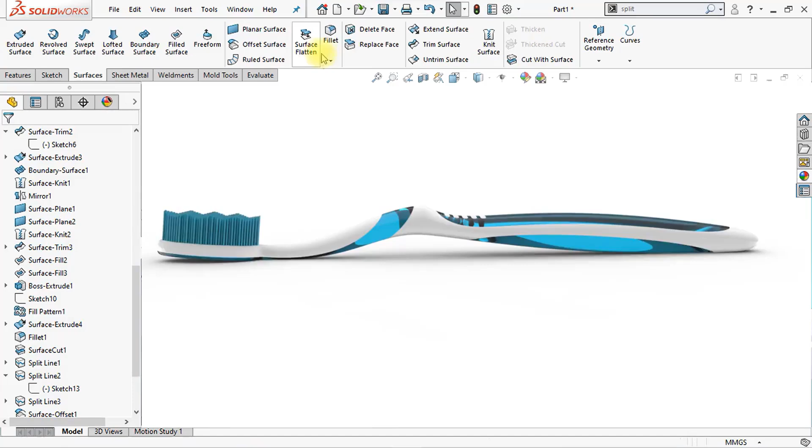Alright, so we're going to start this lesson by making a 2D sketch because we're going to draw the main shape of a toothbrush, so this contour right here.

So we're going to start by opening a new part. Now we're going to change the background color, so click at the Appearance drop-down menu and select Plain White. Alright, now we're going to create a new sketch on the front plane, so select the front plane in the feature tree and click at the 2D sketch icon again.

Now we're going to draw a center line. Click at the center line command and draw a vertical center line up till here. Now hit escape to close the command, and we're going to create another center line starting at this point right here up till here. Now hit escape again and create a third center line starting from here up till here.

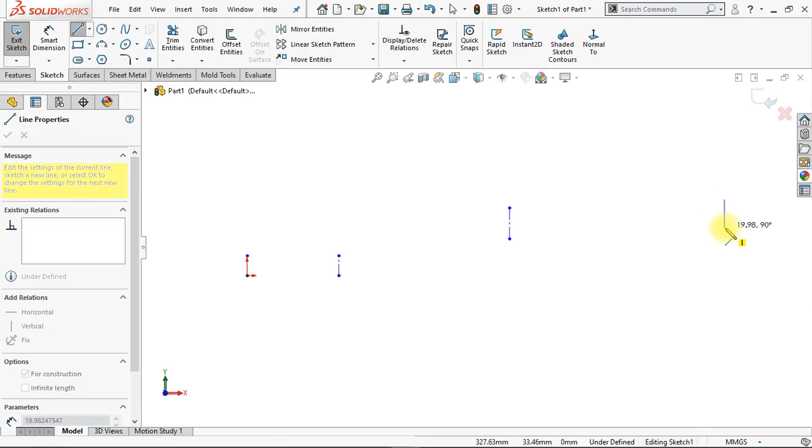And now we're going to create another center line from here up till here. And by the way, if you want to create new center lines, you can also click at Enter in case to reopen the previous command.

Alright, the next thing we're going to do is apply a couple of smart dimensions because we're going to use those center lines in order to define the main shape of our toothbrush. So we're going to make sure to add a horizontal relation between those points right here, and we're going to make sure that the length of those lines is equal by clicking at the equal icon.

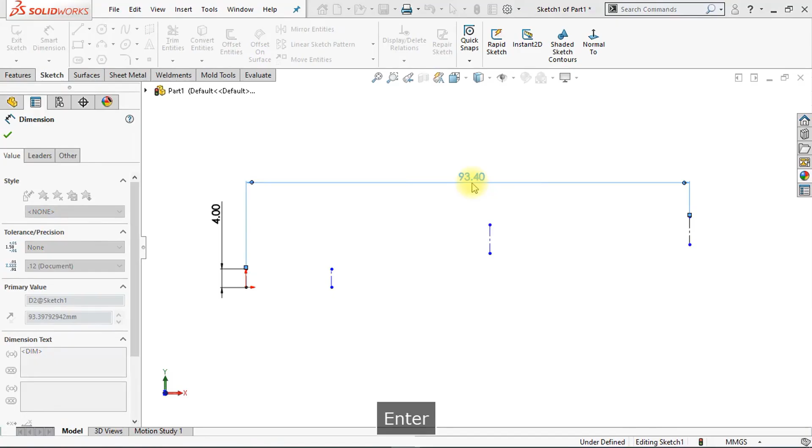Now we're going to make sure that the distance between those two lines is 160 millimeters. And we're going to make sure that the distance between those two lines is 26 millimeters.

Now this line is fully defined, so now we're also going to apply a dimension between those two lines, and the length between those two lines will be 44 millimeters. And the length of this vertical line right here will be 8.5 millimeters.

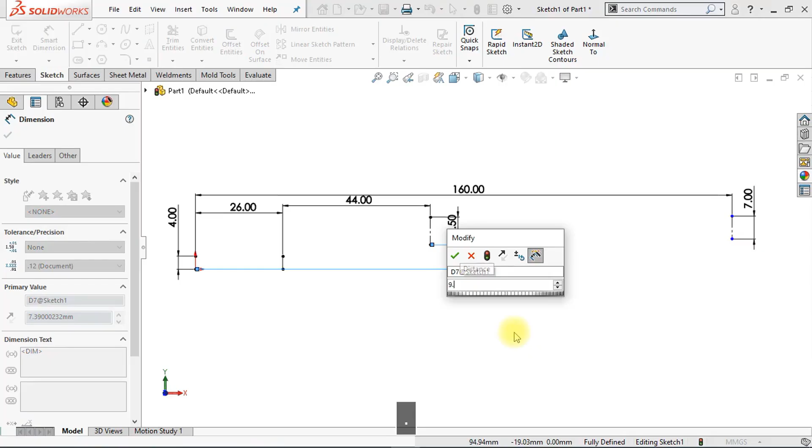Alright, now we're going to define the length of this line right here, and this line will have a length of 7 millimeters. And we're going to make sure that the distance between those two points will be 9.5 millimeters. And now we're going to make sure that the height between those two points is 10 millimeters.

Alright, this looks good. Now we're going to disable the trailing zeros because we have 0.00 behind every dimension, and we can do that by going to Document Properties, Dimensions, and if we click at the trailing zeros right here, we can click at Remove Trailing Zeros and click OK. And now we don't see those unnecessary zeros anymore.

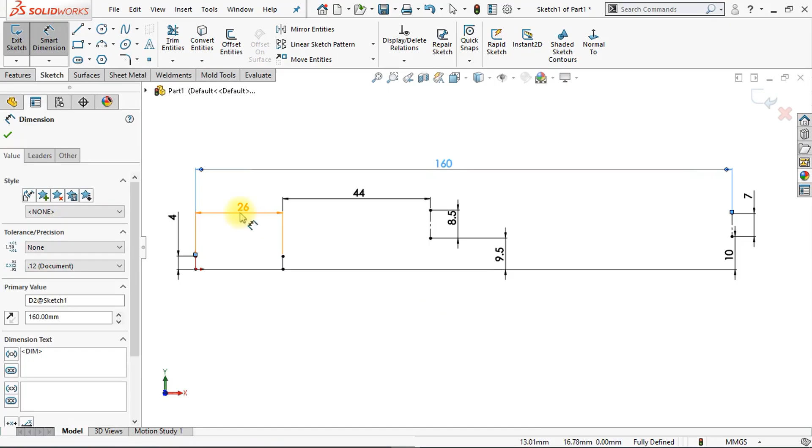Alright, we can align our dimensions a little bit more. This looks about right.

Alright, so the next thing we're going to do is we're going to draw a couple of splines. So click at the spline command and we're going to draw a 2-point spline from this point up to this point. Now we're going to draw a second spline from this point up till this point. Now hit escape to close the spline command.

Now we're going to draw a third spline from here up till here. Hit escape again. Now we're going to create another spline from this point right here up till this point right here. And now we can activate our spline handles.

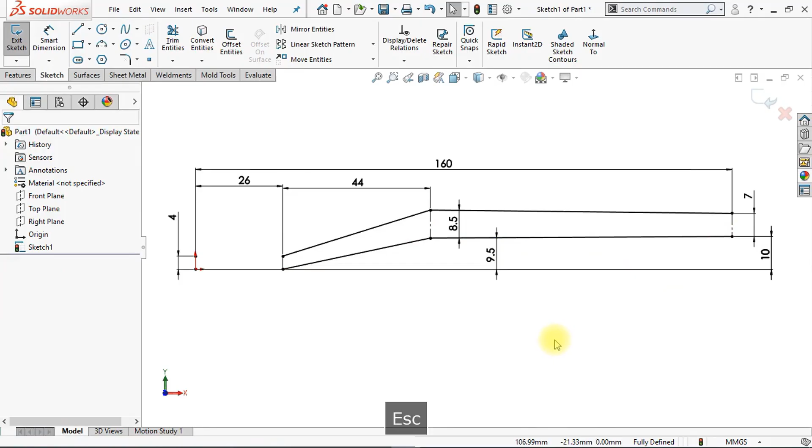So if we're going to zoom in on one of the splines, we can select the spline and now we can activate the spline handles by clicking at those handles right here. And we're going to make sure that this handle right here has a horizontal relation, so click at Make Horizontal.

And we're going to make sure that the length of the spline handle will be 60 millimeters. Alright, now we're going to make sure that the length of this spline handle will be 55 millimeters, and the angle between the spline handle and this vertical center line right here will be 100 degrees. Alright, this looks good.

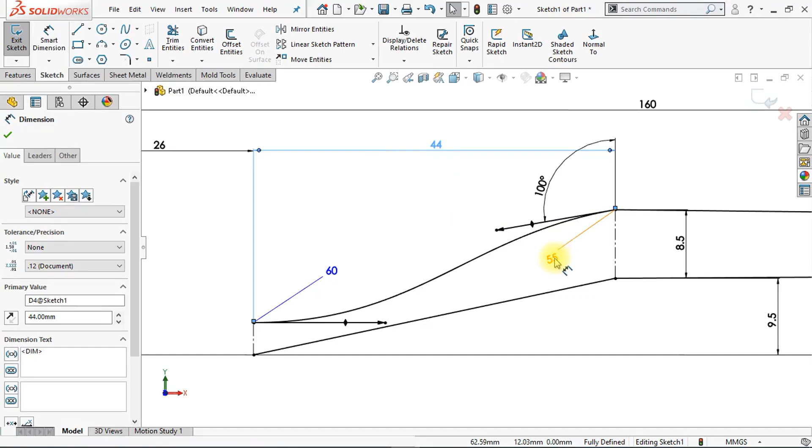Now we're going to apply a couple more smart dimensions to the other splines. We're going to activate this spline handle right here and drag to those handles. Now we're going to make sure this spline handle also has a horizontal relation, so click at make horizontal. And this spline handle right here, we're going to make sure this one is horizontal as well - select the endpoint and click make horizontal again.

Now we're going to make sure to define the length of those spline handles as well. This spline handle will have a length of 75 millimeters, and this spline handle will have a length of 40 millimeters. All right, this looks good.

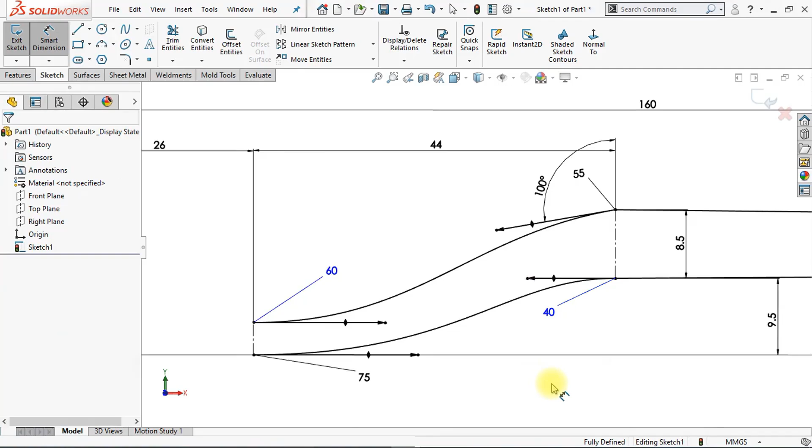Now we're going to activate this spline handle right here and drag a little bit to it in order to adjust the shape. We're going to make sure the length of this spline handle will be 40 millimeters, and the angle between the spline handle and the vertical edge right here will be 120 degrees. All right, this looks good.

Now we're going to move this dimension a little bit, and look to the last spline handle on this side right here. We click at Smart Dimensions again, and make sure the length of this spline handle will be 200 millimeters. And the angle between the vertical edge right here and the spline handle will be 85 degrees.

All right, now this spline also looks good. Now we're going to activate this spline right here, and select this spline handle, making sure the spline handle is horizontal again. And we're going to make sure the length of this spline handle will be 40 millimeters. Just like that. All right.

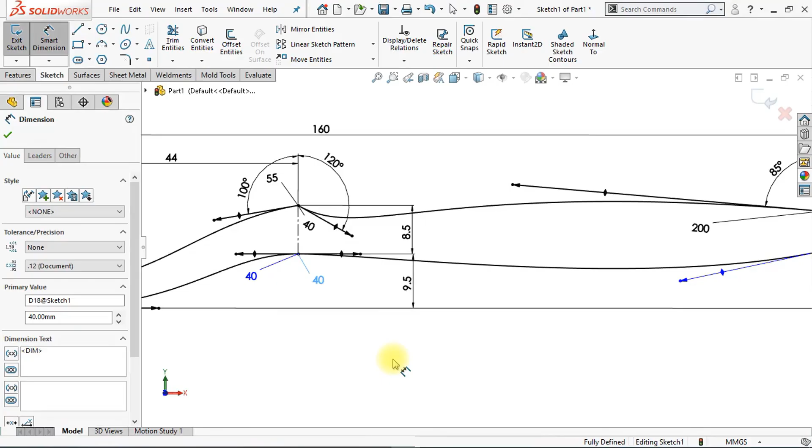Now we're going to adjust this a little bit. We're going to make sure this spline handle will have a length of 45 millimeters, and make sure the angle between the vertical center line and this spline handle will be 84 degrees. And the length of this spline handle will be 150 millimeters. All right, this looks good.

Now we're going to zoom in on this endpoint right here, and click at the style spline. We're going to draw a style spline from here up till here, and make sure to have two spline points in between.

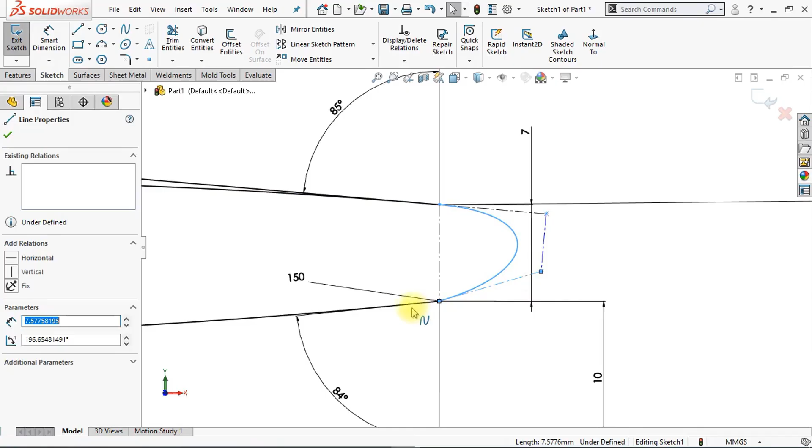Now we're going to apply a tangency relation between the center line and the initial spline, and do the same thing for this side right here. We're going to make sure this center line has a vertical relation. Now we're going to make sure the length between those two vertical center lines will be 9 millimeters. Now our style spline is fully defined, so this looks good.

We can move those dimensions a little bit. All right, this looks pretty nice.

All right, so now we've created the 2D sketch of our main contour. The next thing we're going to do is apply some surface lofts in order to create this curved shape right here. So we're going to divide our main sketch into multiple segments, which we're going to loft individually, and then we're going to make surface transitions between each of those lofts later on.

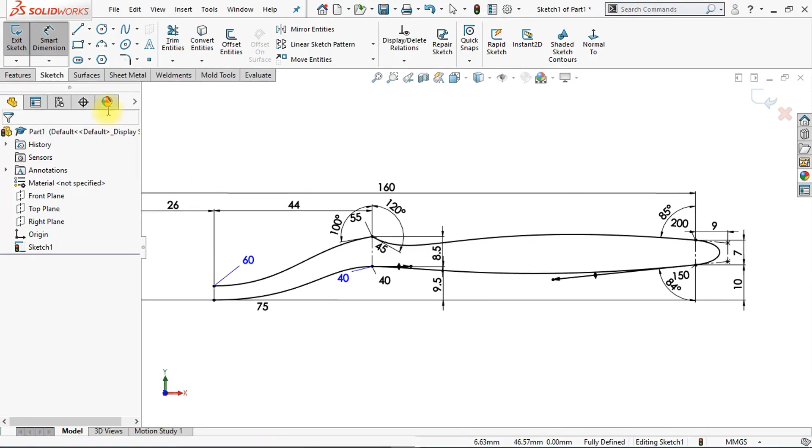Alright, so the next thing we're going to do is create an extruded surface. Click at the extruded surface command right here, and we're going to make sure to set the extrusion depth to 5 millimeters, and reverse the direction, and now click OK.

Alright, now we're going to create a new sketch on the top plane again. So select the top plane, click at the 2D sketch icon. We're going to zoom in on the front section right here, and now we're going to draw an ellipse - click at the ellipse icon, and we're going to start the midpoint of the ellipse right here till the origin.

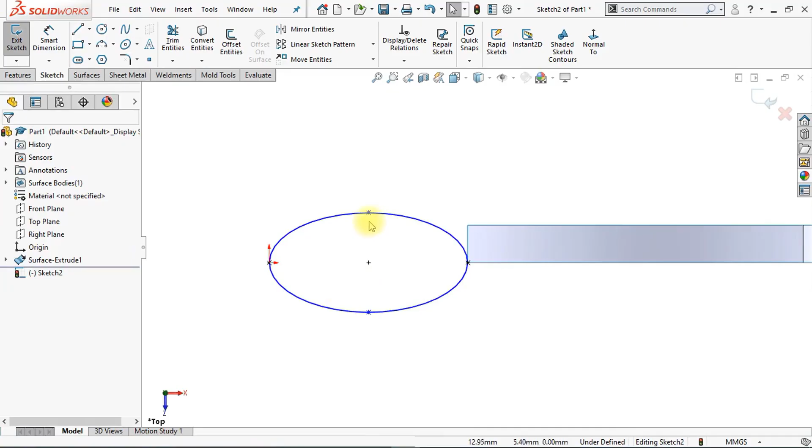Now we're going to make sure to connect this point with this point right here by holding down the Ctrl key and selecting coincident to connect both points. Now we're also going to make sure to make those two points vertical from each other, and make sure the length between those two points is 6 millimeters.

Now we're going to draw another center line from here up till here. And we're going to make sure to use the trim entities to select the power trim in order to trim this part of the line away.

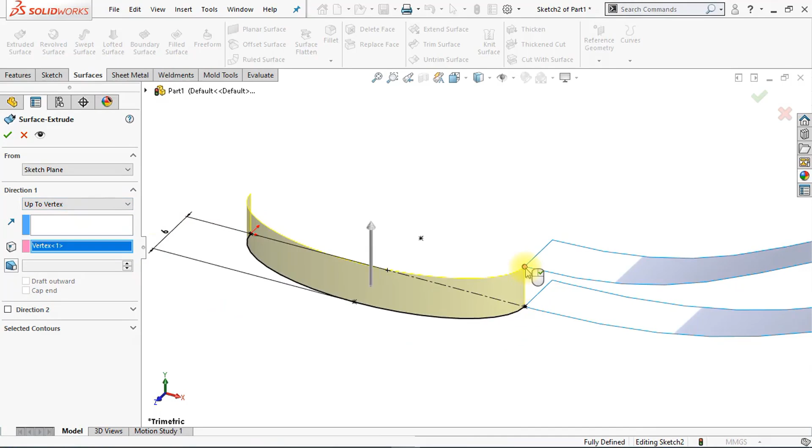Alright, now we're going to draw another surface extrude, so click at the surface extrude option, and we're going to click it up to vertex. We're going to select this corner point right here. Now click OK, and now we have created a beautiful surface extrude.

Now we're going to create a surface loft between those two edges. Select those two edges as loft profiles, and make sure to set the tangency to face. Click tangency to face and change the value to 4, and also change the second profile to tangency to face and set it to 4 as well. Now click OK.

Now we're going to create a new sketch on the top plane. Select the top plane, click the 2D sketch icon, and zoom in on this section right here.

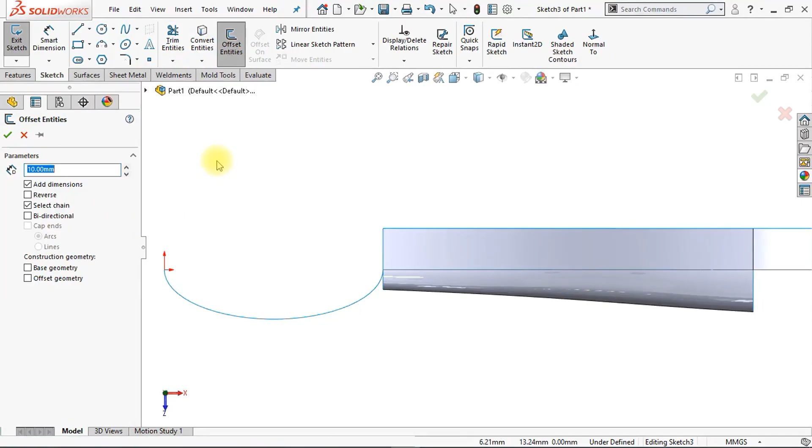Now we're going to create an offset entities. Make sure to set the offset distance to 1.5 millimeters, and select this vertical edge right here. Now select this vertical edge again, click at 2.5, and reverse the direction.

Now we're going to extend those lines a little bit. Make sure to drag to the endpoints up till here.

Now we're going to click trim surface in order to trim this part of our lofted surface away, as well as this surface extrude right here. Now click remove selections, and now the purple sections will be removed.

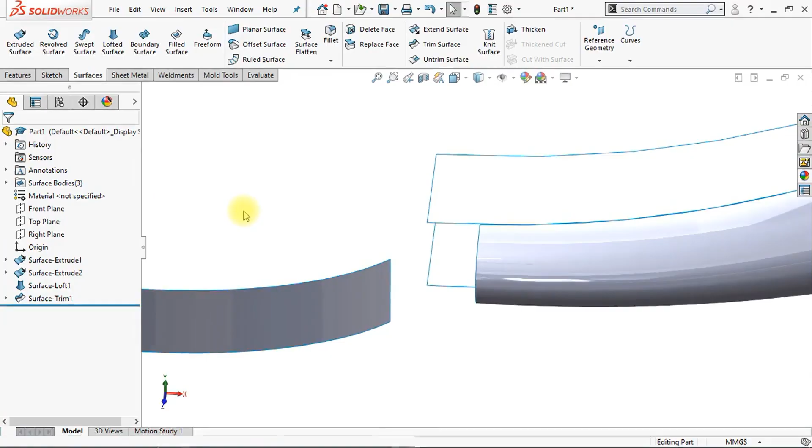This looks good. Now we're going to create a new sketch on the front plane again. Select the front plane, click Normal To, and zoom in on this point right here.

Now we're going to create another ellipse, starting at the center of this edge up till here. This looks good. Hit escape to close the ellipse command, and we're going to make them horizontal.

Now click Smart Dimensions, and make sure that the distance between the midpoint and the outer edge is 1 millimeter. Now our ellipse is black, which means it's fully defined.

Now we're also going to draw a vertical center line right here. We'll click Trim Entities, and then click and drag in order to remove this part of the ellipse.

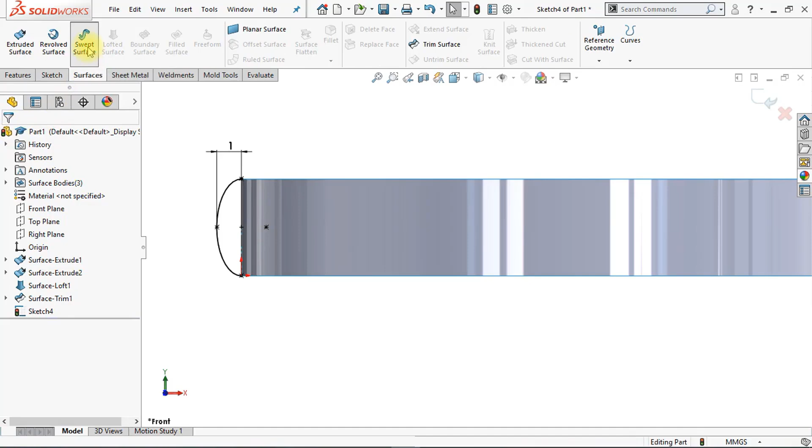We're going to click Surfaces again, then click the swept surface. We'll select the ellipse right here as a sweep profile, and select this pink edge right here as a sweep path. Now click OK, and now we have created a beautiful sweep.

Now we can hide the initial surface extrude right here, and zoom in on this point, because we're going to create a surface transition between those two edges.

Click Surface Loft, and select this edge right here and this edge right here. Make sure to set the start and end constraints to tangency to face, and change the value to 1.5. Now do the same thing for the second profile, and click OK.

And now we have created a beautiful surface transition between those two surfaces right here.

Alright, the next thing we're going to do is create a new plane. Click the Reference Geometry drop-down menu, select Plane, and select this point right here as a first reference.

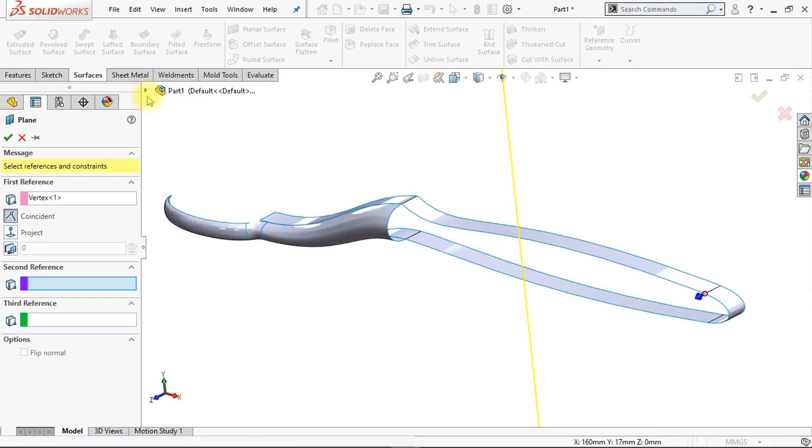Now we're going to open our feature tree and select the right plane right here. We'll close our feature tree again, and now click OK.

Alright, now we're going to create a new sketch on this newly created plane. Click the 2D sketch icon in order to create a new 2D sketch.

We're going to create a style spline again. Click style spline, and draw a style spline from here up till here, up till here, up till here. Now hit escape.

We're going to switch our view to Normal To, and make sure to set this one to hidden lines only.

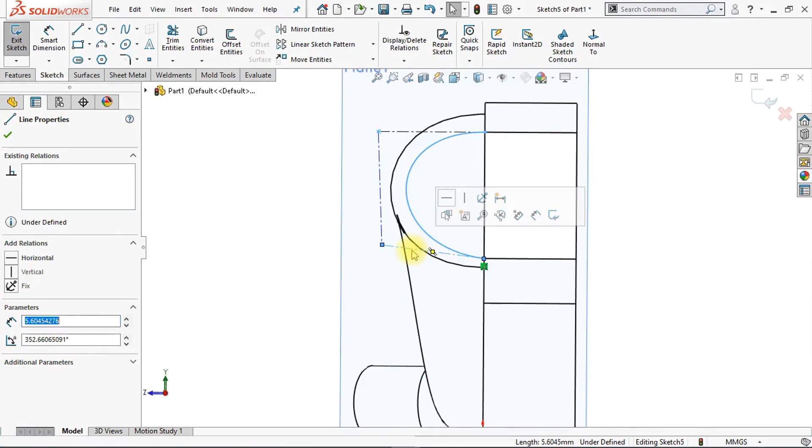Now we're going to make sure to make this line horizontal and this center line as well. Click Smart Dimensions, and make sure that the length of this horizontal line will be 8 millimeters. This looks good.

Now we're going to make sure to set the angle between those two center lines to 75 degrees.

And now we can close the sketch. Alright, now we're going to switch back to shaded with edges. And then we're going to hide this plane right here. So select the plane, click at the eye icon to hide the plane.

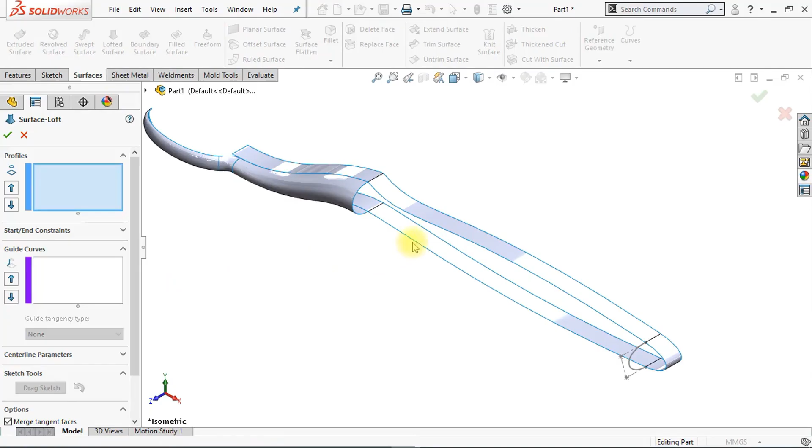And now we're going to create a new surface loft. So click at lofted surface right here. We're going to select this profile right here as our first profile, and this will be our second profile. And now we're also going to select the guide curves: this guide curve right here and this guide curve right here.

Now we're going to make sure to set the surface start end constraints to tangency to face right here, and set the value to 3. The end constraint will be tangency to face as well, and we're also going to make sure to set this one to 3 as well. Now click OK, and now we have created another beautiful surface loft right here.

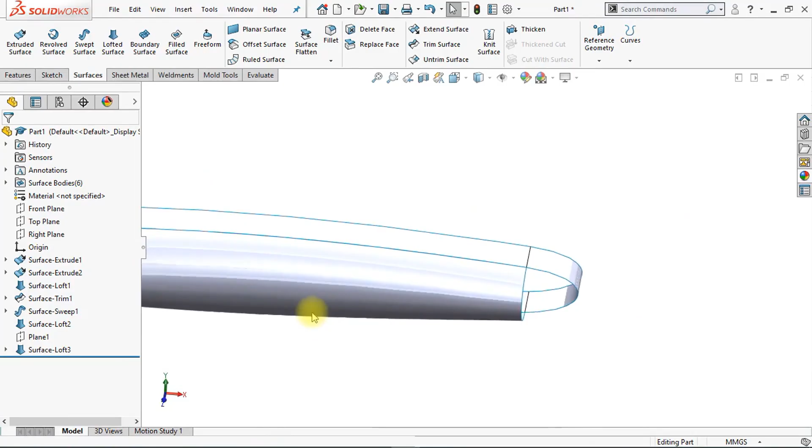Alright, now we're going to make sure to fill this surface right here. In order to do that, we're going to use the filled surface. Therefore, we're going to select those two edges right here. Make sure to click at apply to all edges, and we're going to apply a tangency relation, setting it to tangent. We're going to deselect the optimized surface and now click OK. And now we have created a beautiful surface.

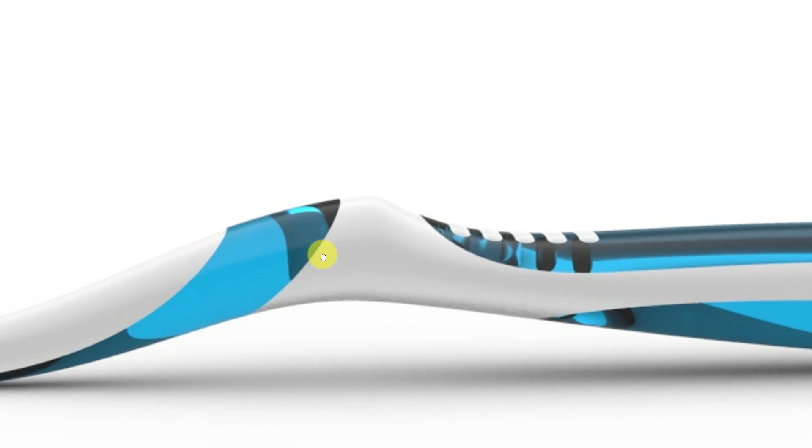Alright, so now we've created this main shape right here, and we also created this main shape right here. The next thing we're going to do is create this surface transition right here. Once we have created this surface transition, we're also going to create the surface transition in this area, because we created this surface and this surface, but we also want a smooth transition in this area right here. So that's what we're going to do next.

Alright, now we're going to hide our surface extrude because we don't need it anymore. And we're going to select the front plane and click at the 2D sketch icon in order to create a new sketch on the front plane again.

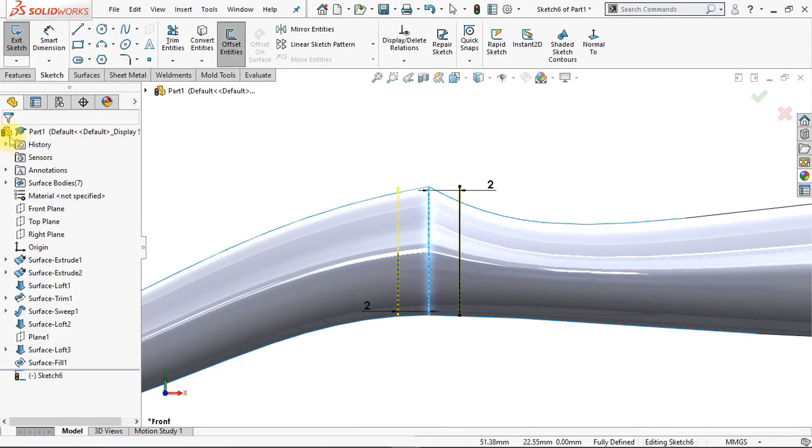Now click at offset entities, and we're going to select this edge. Make sure to set the offset distance to 2mm and click bidirectional in order to make an offset in both directions. Now we can click and drag to the end point of those sketches right here in order to extend them a little bit.

And now we're going to trim those two surfaces right here. So click at the trim surface, select the remove selections, and this will make sure that our purple surfaces will be deleted. Alright, the next thing we're going to do is we're going to create a new transition between those two surfaces right here.

And therefore we're going to create a new sketch on the right plane. So we're going to create a new spline, and we're going to make sure to add a couple of transitions between those spline and the endpoints by clicking at the edge, selecting the spline, and now adding a tangency relation to both sides of our spline.

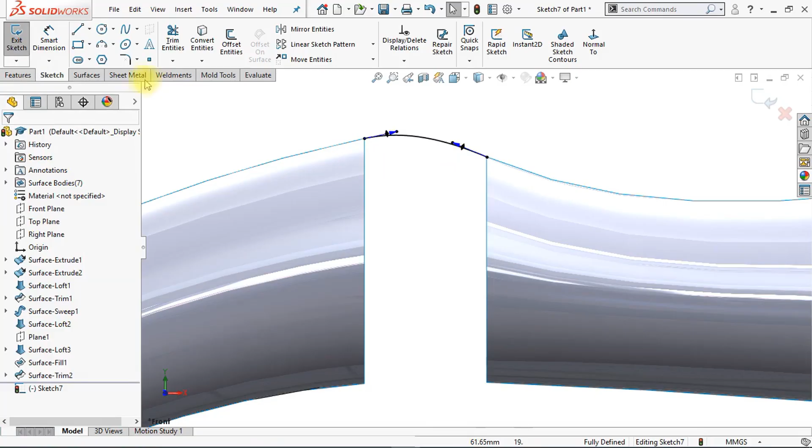Now we're going to make sure that the spline handles will have a length of 6mm.

And now we're going to create a style spline for the lower section right here. So we're going to select those lines right here. We're going to apply a tangency relation right here. Now we're going to select this edge, hold down your Ctrl key and click at make tangent again.

And now we're going to make sure to delete this endpoint right here, this spline point right here. And we're going to make sure that this center line right here and this center line will be equal. So we're going to select them both by holding down your Ctrl key and click at make equal.

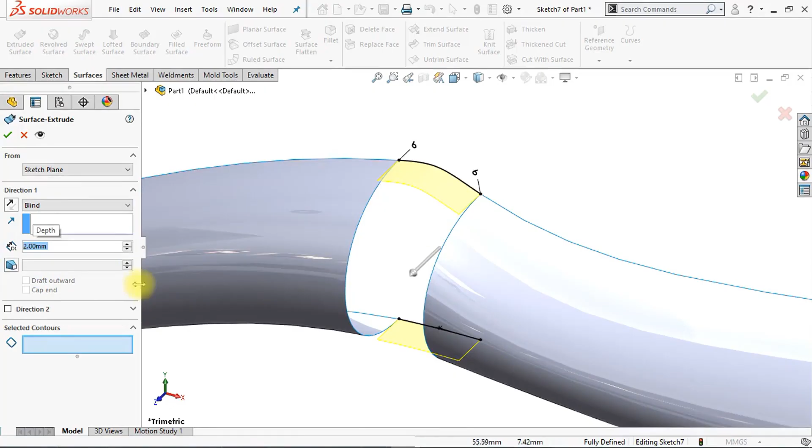Alright, the next thing we're going to do is we're going to create a new surface extrude. So click at the surface extrude, make sure to set the surface direction and depth to 2mm. Click at reverse and now click OK.

Alright, this looks good. Now we're going to click at the boundary surface, and we're going to create a boundary surface between those two faces right here by selecting the first edge and now select the second edge. And now we're also going to select this third edge right here and the fourth edge right here.

Now this is not looking exactly how we want it, so we're going to delete those last two edges right here. So click at delete, and now we're going to select the direction 2 box right here.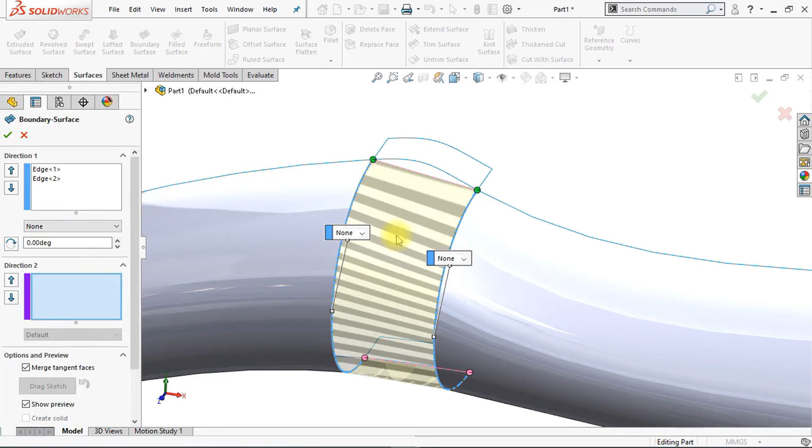Now we can select this line again, and we're going to do the same thing for the other line right here. So select this line as well. Alright, this looks much better.

Now, of course, we also need to apply a transition right here. So click at the tangency to face. We're also going to set the second one to tangency to face, and we're also going to make sure to set those two to tangency to face.

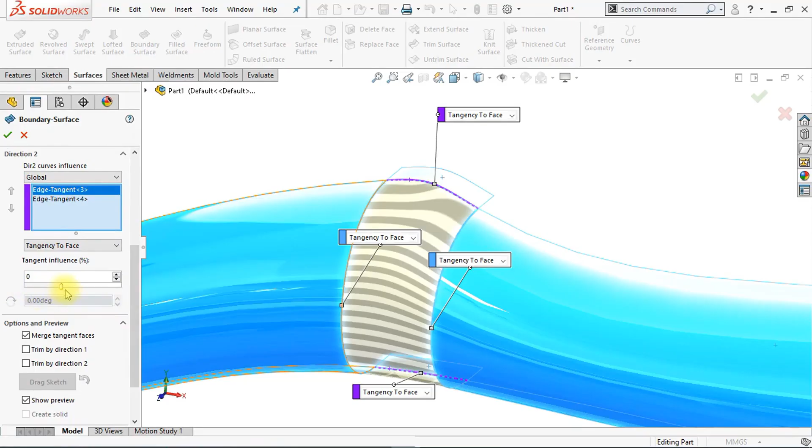Alright, this looks pretty good. Now we can also adjust the tangent influence, and we're going to make sure to set the tangent influence to 100%. And we're going to do the same thing for the tangent influence right here. Set this one also to 100% and now click OK.

Alright, this looks good. Now we can hide our surface extrude because this was only a help surface. And now we have created a beautiful surface transition right here.

Alright, now it's time to knit all those surfaces together. So we're going to select the first, second, third, fourth and fifth surface right here. Now click at Merge Entities and click OK. And now we have merged all those surfaces together.

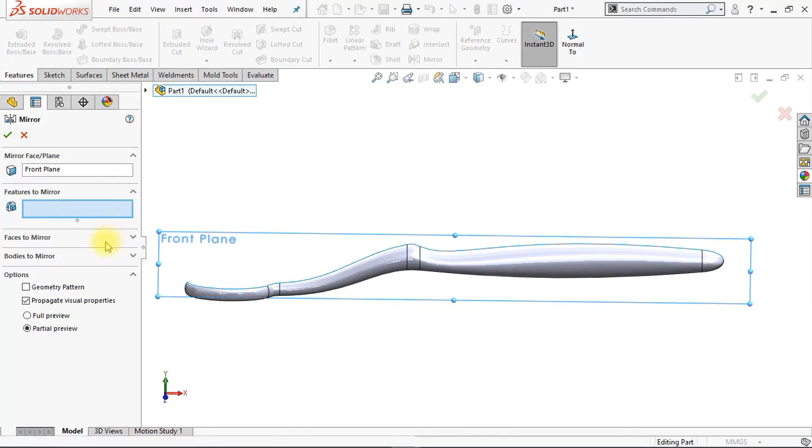And the next thing we're going to do is we're going to create a mirror. So select the front plane in the feature tree, and we're going to click at Bodies to Mirror right here. Now select the knit surfaces and click OK. Alright, this looks pretty good.

Now we're going to click at the planar surface. We're going to zoom in a little bit and we're going to select those two lines right here in order to create a planar surface. Now click OK.

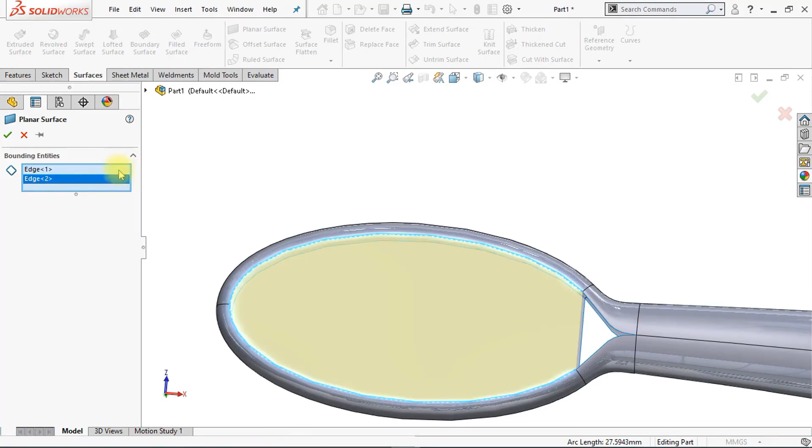Alright, now we're going to create another planar surface for the other side. So we're going to select this edge right here and this edge right here. Now click OK again. This looks good.

Now we can knit all those surfaces together. So we're going to select each of those three surfaces in order to knit them all together. Alright, this looks good.

Now we're going to create a new sketch on the top plane. So select the top plane, click at the 2D sketch icon. We're going to zoom in to this edge right here.

Now we're going to click at the spline command. We're going to draw a spline from here up till here. Now hit escape to close the spline command, and now we're going to make sure that this midpoint and the end point of the spline will be vertical to each other.

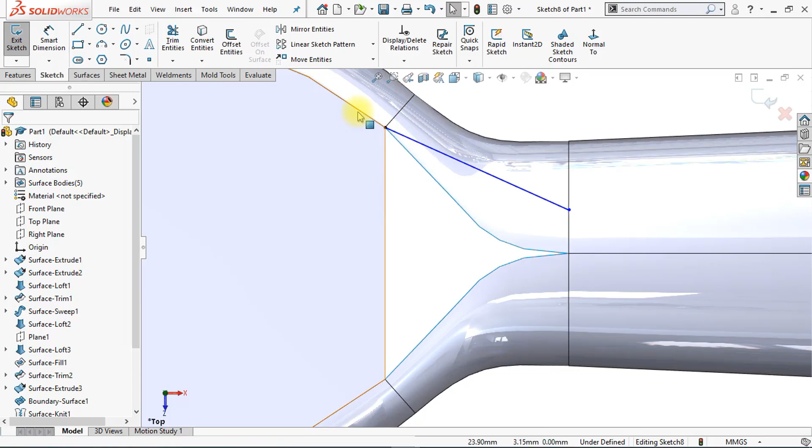And we're also going to make sure to add the tangent relation between the spline and the edge right here. Now we're also going to apply a horizontal relation right here.

We're going to make sure that the length of this spline handle will be 7.5 millimeters. And we're also going to make sure that the length of this spline handle will be set to 7.5 millimeters as well. We're going to make sure that the distance between the spline and the midpoint will be 0.5 millimeters.

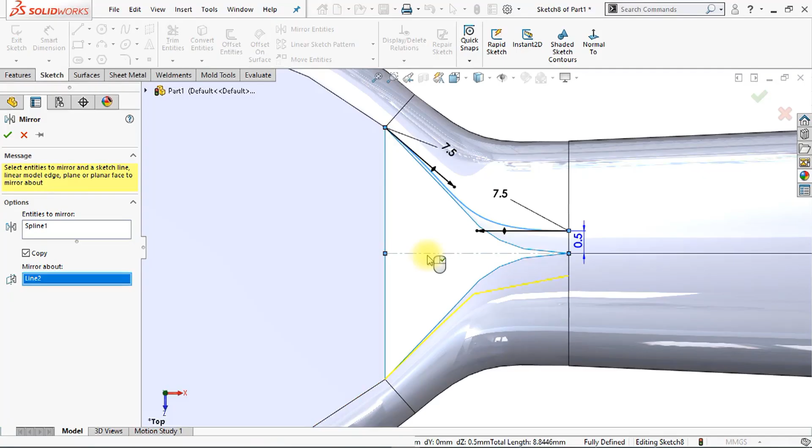Alright, now click at the centerline command and we're going to draw a centerline from here up till here. Now click at the mirror entities. We're going to select this spline right here. Click at mirror about and we're going to select the centerline. Now click OK. And now we're going to make sure to draw a vertical line right here.

Hit escape to close the line command.

We're going to click at the trim surfaces and now we can select this face right here. We want to keep the purple face. We only want to delete the blue face and now click OK.

And now we have deleted those small surfaces right here.

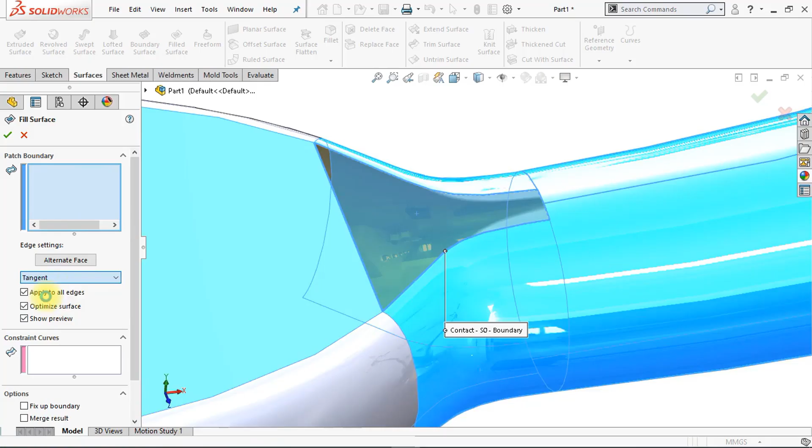And now, of course, we're going to fill those surfaces again using the filled surface option. So select one edge, right click, select open loop. Now we're going to make sure to set the surface transition to tangent. Make sure it's set to apply to all edges. And we're going to deselect the optimized surface. We're going to select the merge results and now click OK.

Alright, this looks good. Now we're going to repeat this process for the other side. Click at the filled surface command again. Right click on the edge, select open loop, and make sure to set the transition to tangent. We're going to deselect the optimized surface, and make sure that apply to all edges is enabled. Now click at merge result again, and also click at create solid in order to create a solid geometry of our surfaces.

Alright, we just created the base of our toothbrush. This looks pretty good. If you now make a section view, you can see that we now have a solidified model. Alright, we can turn off the section view again.

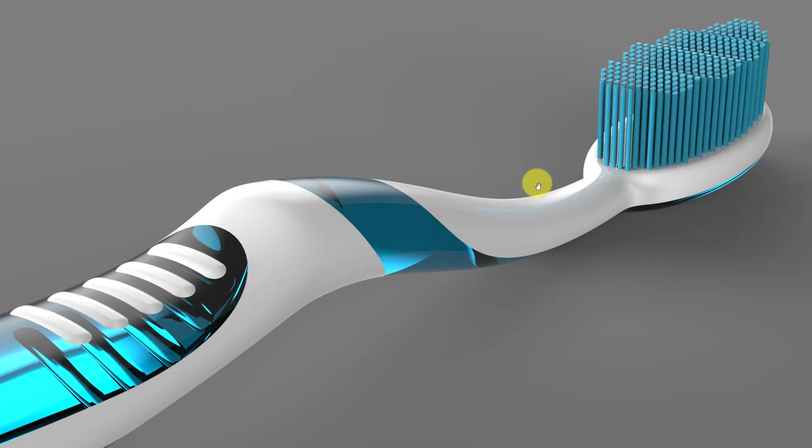The next thing we're going to do is create those brushes right here. So we're first going to model one of those hairs, and then pattern those hairs right here. I'm also going to show you how to make this waved shape right here.

Alright, so we're going to continue by making a new sketch on this face right here. Select this face, click at the 2D sketch icon, select normal to, and now we're going to reuse one of our earlier sketches, the sketch in Surface Extrude 2. So click at sketch 2, and now use this midpoint of the sketch in order to create a new circle.

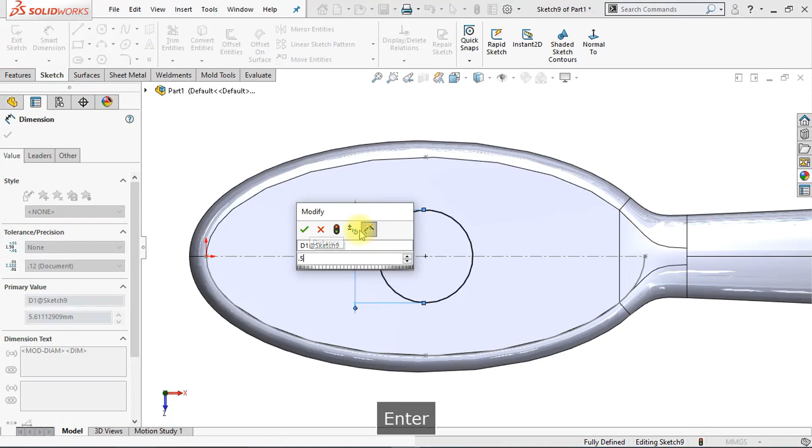Draw a new circle, and make sure that the diameter of this circle is set to 0.5 millimeters. Now we can hide the sketch again because we don't need it anymore.

Alright, now we're going to create an extrude. Click at extruded boss base. We're going to make sure that the direction is pointing upwards like this, and we're going to change the length of our hair into 8 millimeters. Now click OK. Alright, this looks good.

Now we're going to create a new sketch on this face right here, because we're going to use a fill pattern to pattern our hair over this entire area. Therefore I need to create a sketch in order to define the pattern area. Alright, so we're going to make sketch 2 visible again.

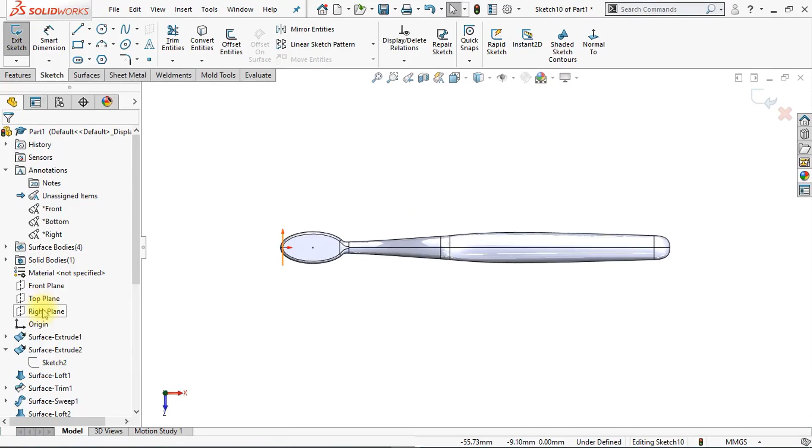We're going to zoom in a little bit, and now I'm going to create a new ellipse. Click the ellipse drop down menu right here, select the ellipse, and we're going to start the ellipse at the midpoint right here, up till this point right here, up till this point right here. Now make sure to connect this endpoint with the center line by snapping it to the center line midpoint.

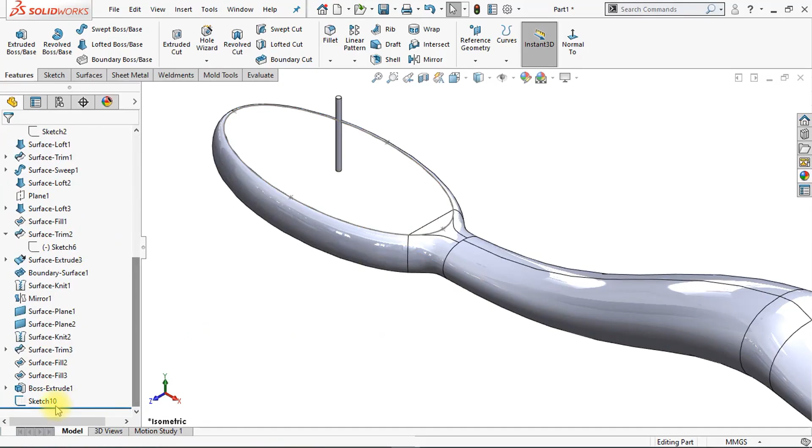Now we can hide sketch 2 again, and we're going to edit our newly created sketch right here. Click at normal to, we're going to zoom in a little bit, and now click at the centerline command again, and draw a vertical centerline right here. Now we're going to close the sketch.

The next thing we're going to do is pattern our hair over the entire surface. Therefore we're going to click at the pattern drop down menu and click at fill pattern. Now click at fill boundary, and that will be this sketch right here. Now we're going to define the path direction, and that will be this construction line right here.

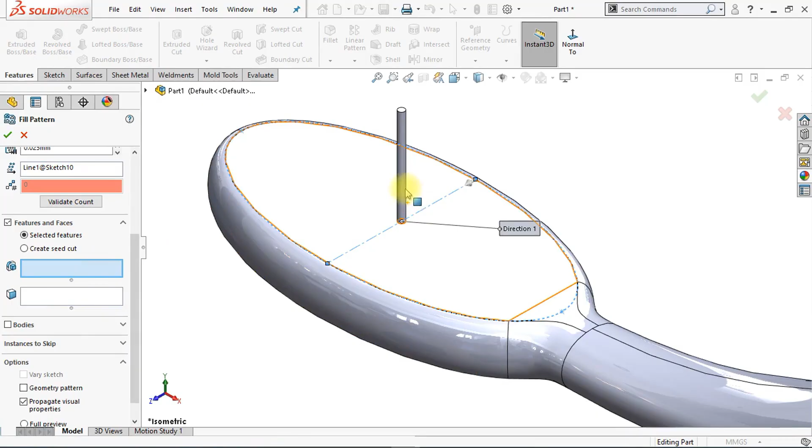Now we're going to scroll down a little bit, and we're going to use this feature in order to pattern. So click at the extrude pattern. Now we're going to define a pattern distance, and we're going to set this to 0.75. And we're going to make sure that this value right here is set to 0.025. Alright, now this looks pretty good, and this way we have created many hairs with one single feature.

Now we can hide our earlier created sketch, and we're going to create a new sketch on the front plane. Select the front plane, click at the 2D sketch icon, and now we're going to create the waved pattern on top of our hairs. Therefore we're going to zoom in a little bit, click at normal to, and now I'm going to create a center line

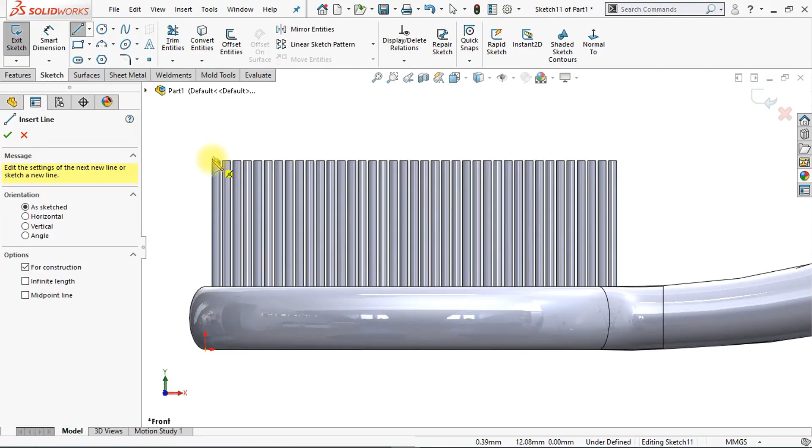starting at this point right here up till this endpoint right here. Alright, now we're going to hide our filled pattern because we don't need it right now. And now I'm going to draw some zigzag lines, so we're going to draw 2 lines right here.

We click at make equal to give them the same length. And now we're going to apply some smart dimensions, making sure the height between the center line and this point right here will be 1 millimeter.

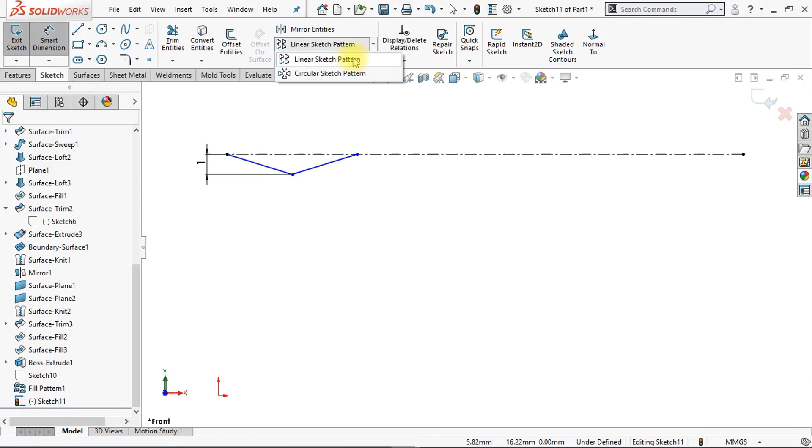Now we're going to click at the linear sketch pattern. We're going to select those 2 lines right here, adjust the number of instances to 4 and the spacing to 5 millimeters, and click OK. Now we have patterned our sketch.

Now if we drag to one of those points right here, we can adjust the pattern, making sure to snap the endpoints to each other. And now you can see that the sketch turns black, which means it's fully defined.

This looks good. Now we're going to create a surface extrude. Click at the surfaces extrude option. We're going to make sure that the depth is set to 15 millimeters and direction 1 is set to mid plane.

Now click OK. Now we're going to create a fillet to the edges. We select this edge right here, and now click at internal to feature in order to select all those inner lines at once. Now we're going to change the fillet size into 1 millimeter, so type in 1 and click OK.

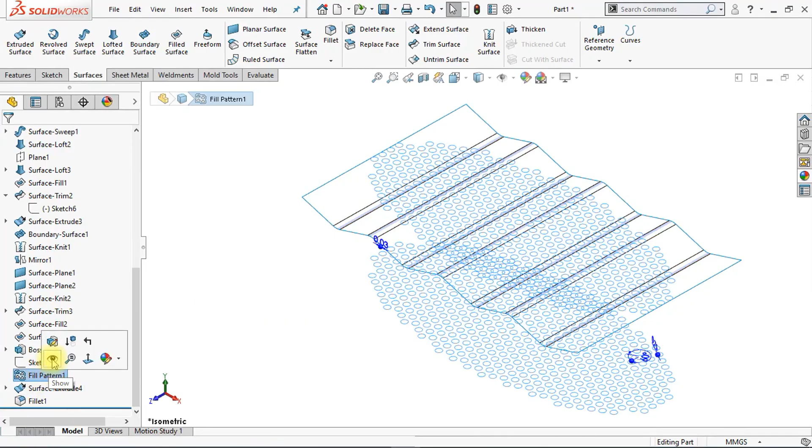This will be our help surface. Now we can show our fill pattern again, and we're going to use this surface in order to cut the upper part of those bodies away. Therefore we're going to use the cut with surface option. Click at cut with surface and select our newly created surface extrude.

Now we're going to zoom in a little bit and make sure that the arrow is pointing upwards like this. This is the direction that the surface cut will cut the material away. This looks good. Now we're going to hide our surface body because we don't need it anymore, so select the body and click at hide.

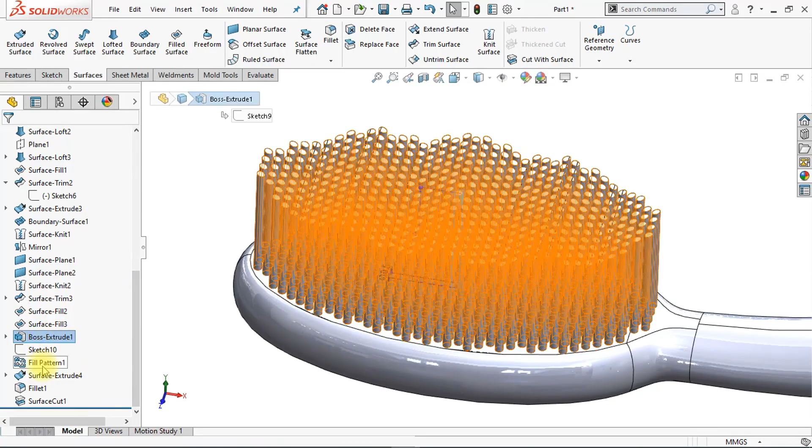So the next thing we're going to do is apply some materials to our bodies right here. Therefore we're going to select boss extrude 1, hold down the Ctrl key, click at the fill pattern and the surface extrude, and click at the surface drop down menu right here. We're going to select surface extrude, so we're going to apply material to the features right here.

Now we're going to click at the appearances drop down menu and apply a matte rubber, for example. Of course you can use any material you like. Let's say this one should be 0, 142, and 223 to make it a little bit more blue. Alright, this is pretty good.

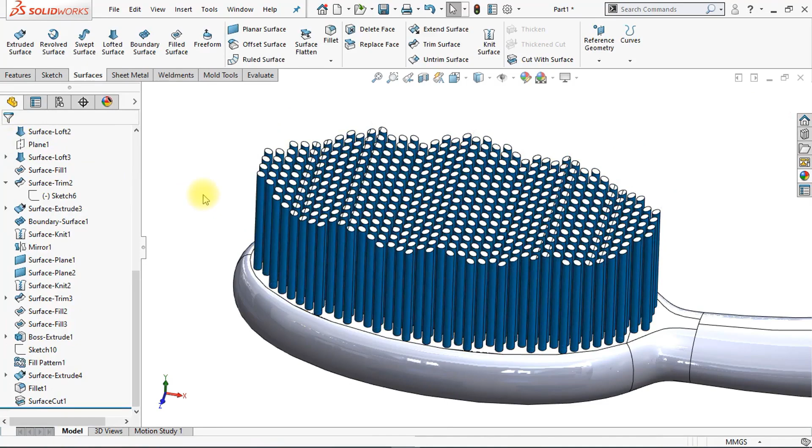So the next thing we're going to do is apply some split lines so we can apply multiple colors to those faces right here.

Now we're going to continue by making the split lines onto our main body. Therefore we're going to create a new sketch on the front plane. Select the front plane in the feature tree, click at the 2D sketch icon, select normal to, and now we're going to create a new offset entity sketch.

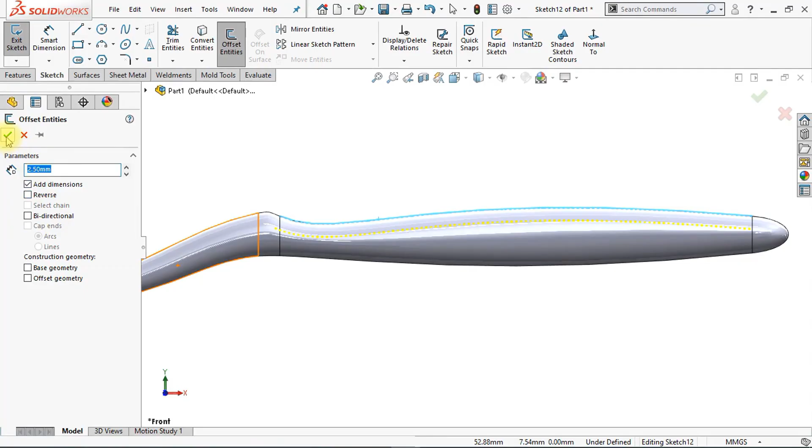Click at offset entities, make sure to set the offset distance to 2.5, make sure that bidirectional is turned off, and make sure that the offset is pointing downwards like this. Alright, this looks pretty good.

Now we're going to click and drag to the endpoint in order to move the endpoints a little bit. And now we're going to apply some smart dimensions: the distance between this line right here and the left endpoint of our spline will be 15 millimeters, and the distance between this right endpoint and this point right here will be 20 millimeters.

Now we're going to use the offset entities in order to offset this edge again. Make sure to turn on the reverse direction and also click at offset geometry, and we're going to click at point 1. The reason I'm creating this center line is because I want to make sure that our sketch is fully intersecting with our geometry.

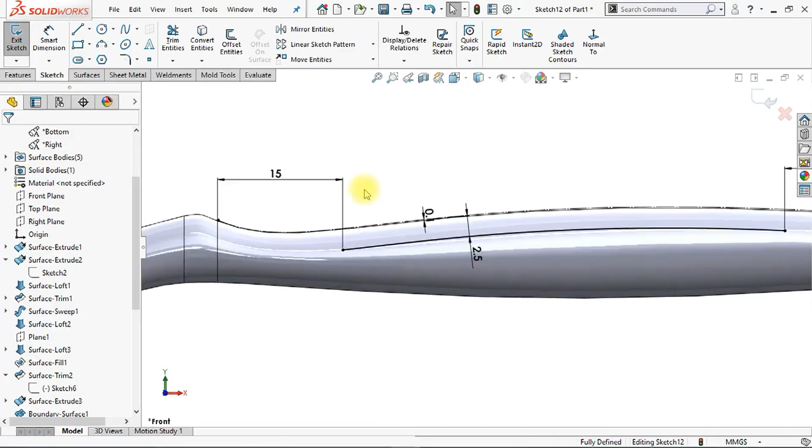If I snap the endpoints of our lines at the edge, there is a chance it will not work. So therefore I'm creating some center lines in order to make sure that our sketch is fully intersecting with our model. And now the next thing I'm going to do is create a style spline starting at this point right here, up till here, up till somewhere around here.

Now I'm going to make sure to make those two lines tangent. You will get an error, that's not what we want, so we're going to delete this tangency relation. Now we're going to select the center line and this spline right here, apply a tangency relation, and this will work.

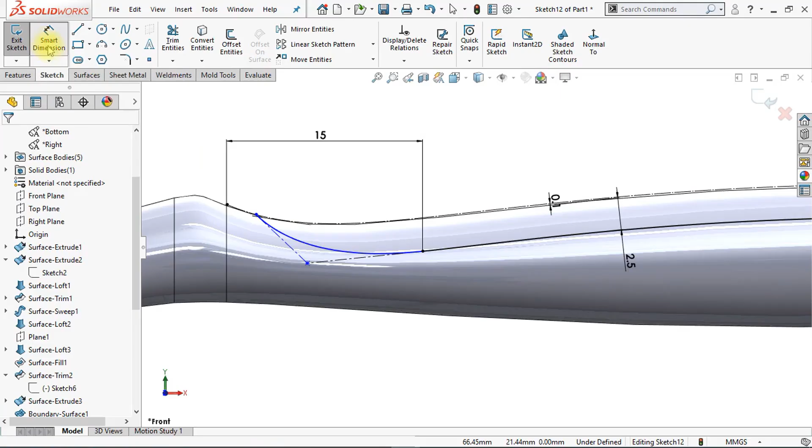Now we're going to select the endpoint of our spline, hold down Ctrl, select the center line, and add a coincident relation between those two. Now we're going to make sure the distance between those two points is 14 millimeters. We're also going to define the angle between those center lines, making sure it's set to 125 degrees.

Now we're going to create a new style spline starting at this point, up till here, up till somewhere around here. Hit escape to close the style spline command. Now select our spline, hold down Ctrl, select the center line, and apply a tangency relation. Select the right endpoint, select the center line again, and click Make Coincident.

Alright, now we're going to apply some smart dimensions again. We're going to make sure the distance between those two points will be 18 millimeters. Now hit enter, and we're going to make sure the angle between those two center lines will be set to 150 degrees.

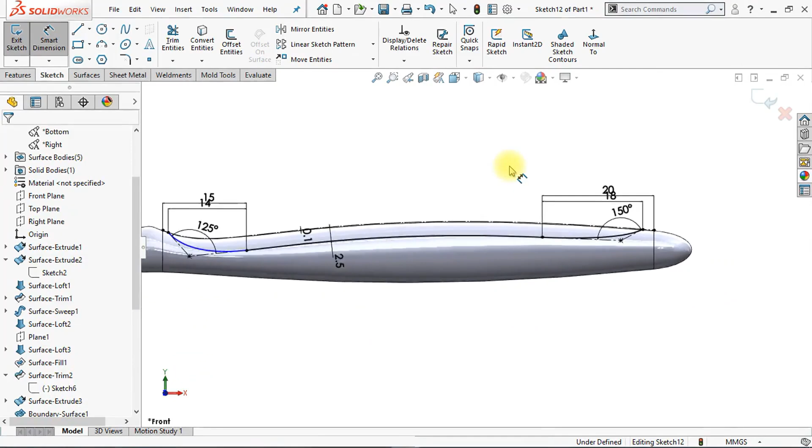The next thing we're going to do is create an offset entities for the lower edge right here. We click at offset entities, make sure the offset is pointing outward, so click reverse, and make sure the offset distance is set to 0.1 millimeter. Now we have created a new center line.

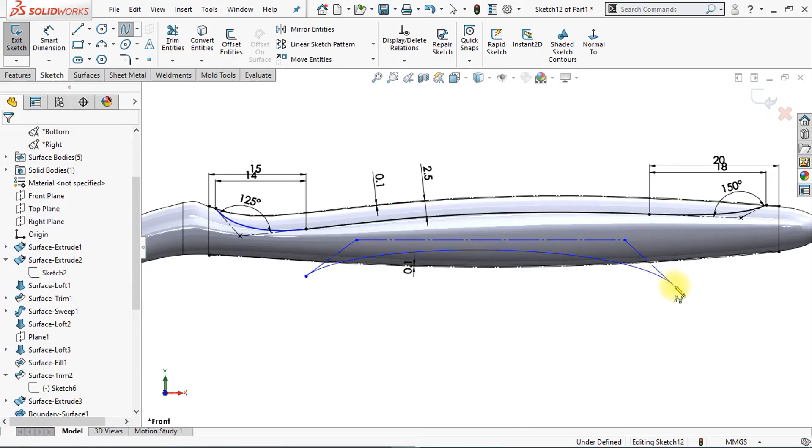Now we're going to create a new style spline starting somewhere around here, up till here, up till here, up till here. Hit escape. Then we're going to change our display style to get a better view on our sketch.

Now we're going to select this endpoint right here, select the center line, and click Make Coincident. We're going to do the same thing for the other side, so select the endpoint, click at the center line, Make Coincident again.

Alright, now we're going to apply some smart dimensions and make sure the distance between those two points is 10 millimeters. And the distance between those two points right here will be, let's say, 6 millimeters.

This looks good. Now we're going to apply a new center line, starting at the midpoint right here, up till here. We're going to make sure this line is horizontal, so click Make Horizontal. Now we're going to make sure those three lines right here are symmetric, and this way we can create a symmetric curve.

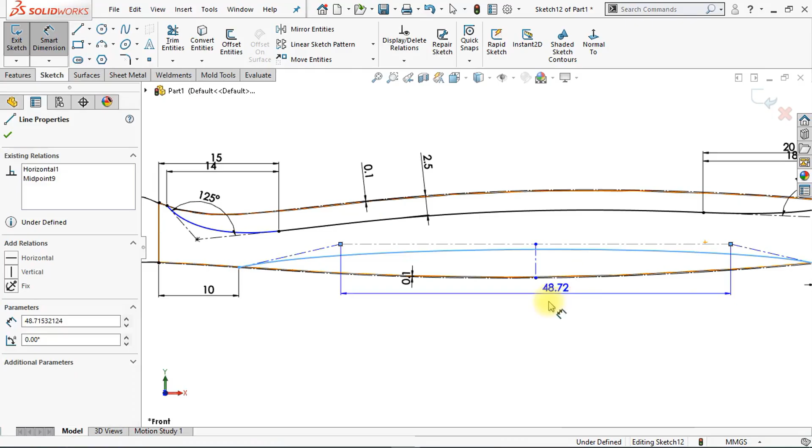Now we're going to apply some more smart dimensions. Click at Smart Dimension and make sure the length of this horizontal center line is set to 55 millimeters. Alright, this looks good.

Now we're going to drag this endpoint right here to make our curve a little bit higher. Now I'm going to apply another smart dimension, making sure the angle between those two lines is 60 degrees.

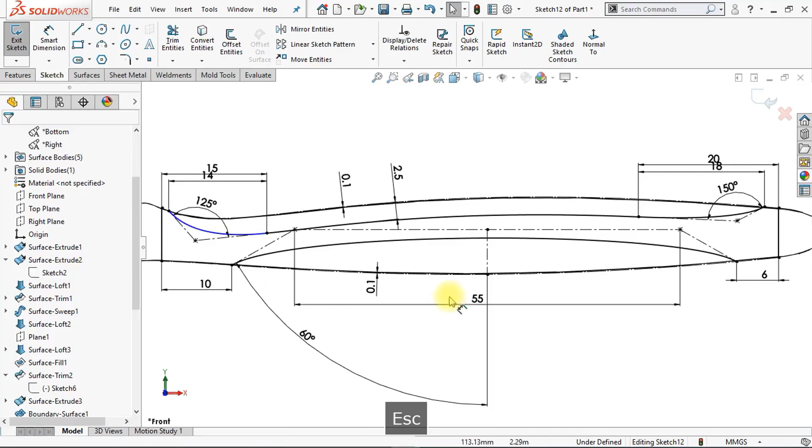Now our sketch turns black, which means it's fully defined, and that's because we made our center line symmetric, and that's why the other side is also black right now. This looks pretty nice. We can change our display style back to shaded with edges.

We're going to click at surfaces. Now we're going to use the split line in order to split our surfaces, and this way we can apply different colors to different surfaces. So select split line, we're going to select this face right here, and we're also going to select this face right here. Now click OK, and now we have created a split line onto our surface. So our model is still one solid geometry, but we created split lines onto those surfaces right here.

Alright, now we're also going to create split lines to the front section of our toothbrush, and therefore we're going to create a new sketch on the front plane. We're going to create a new horizontal line right here.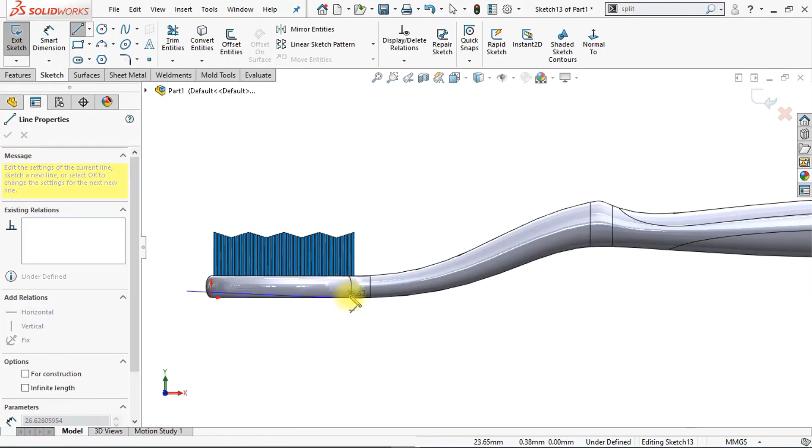We're going to apply some smart dimensions, and we're going to make sure that the distance between this line and the origin is set to 1 millimeter.

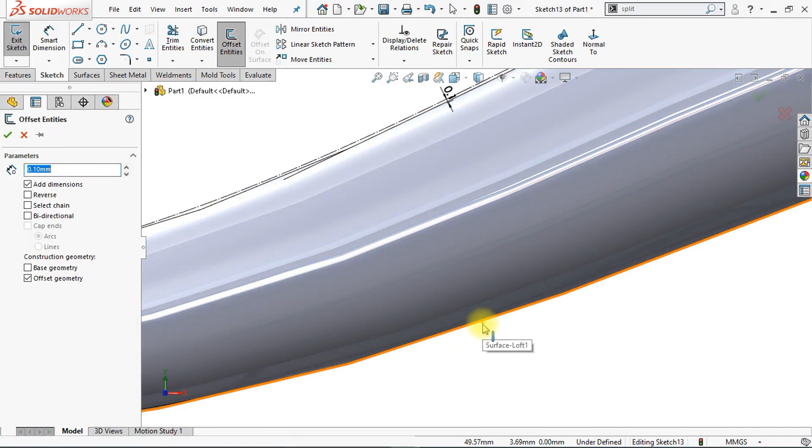Now we're going to create a new center line and offset it from this edge, making sure the offset distance is set to 0.1 millimeter. We're also going to do that for this edge right here. Oops, that's the wrong one. We'll close the offset entities command and reopen it, then select this edge right here, set the offset distance to 0.1 again, and make sure the offset is pointing outward.

Right, so we're going to create a new style spline. Click the style spline command, and draw a point right here, then make one point right here. Click escape to close the style spline command, and now we're going to connect the endpoint of our style spline with the center line by holding down the Ctrl key and clicking make coincident.

We're going to drag a little bit to this line right here. This looks good. Now we're going to apply another smart dimension from this point up to this point, and make sure to set the distance to 30 millimeters, with the angle between those two center lines set to 120 degrees.

Now we're going to create a 3-point arc, starting at the center line right here up till this center line right here, and draw an arc like this.

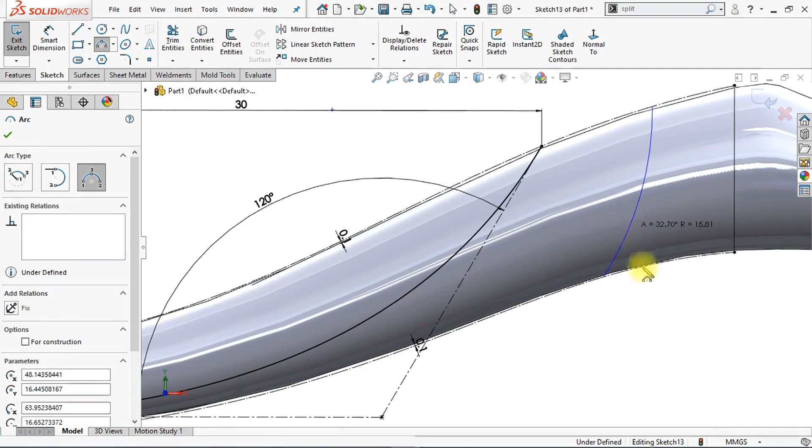We're also going to apply some smart dimensions, making sure the distance between those 2 points is set to, let's say, 1, and the distance between those 2 points is set to, let's say, 8. Now we're also going to apply a radius, set to 30 millimeters. All right, this looks good.

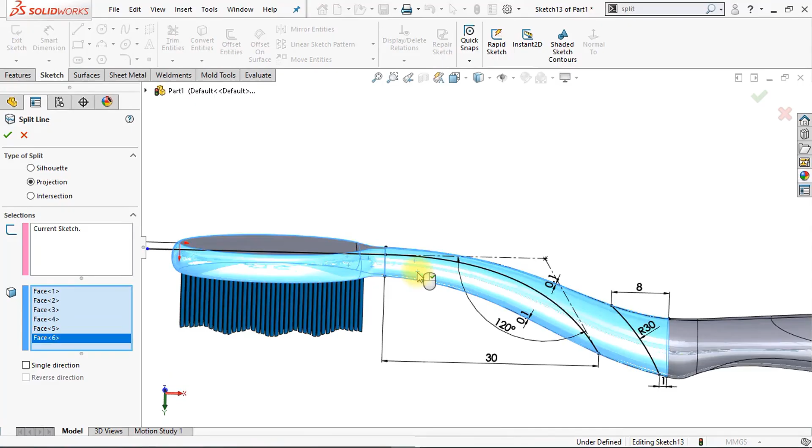Now we're going to create a new split line again. Click the search box, select split line, and make sure to select this face, this face, and this face, and also those faces on the other side, in order to split our surfaces. Now click OK, and now we have split our surfaces again. Alright, this looks pretty nice.

Now we're going to copy the material of our hair. So we're going to select one surface of our hair bodies, right click, copy appearances. Now we're going to select all the faces we want to apply the color on by holding down the Ctrl key, select all those faces right here, and click paste appearances.

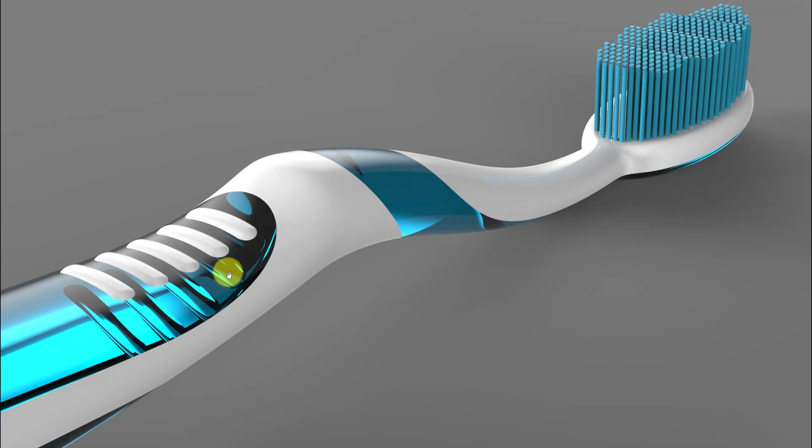Now we're going to make those 5 ribs right here. So we're going to continue by making a new sketch on the top plane. Select the top plane in the feature tree, click the 2D sketch icon. We're going to zoom in a little bit, and now we're going to use the center point straight slot to draw a slot right here.

Now we're going to apply some smart dimensions, making sure the length of this vertical center line is set to 5 millimeters, the radius right here is set to 0.75 millimeters, and the distance between this point and this point will be set to 3 millimeters.

This looks good. Now we're going to apply a linear sketch pattern. We're going to select this sketch, make sure that distance 1 is set to 2.5 millimeters, and the number of instances is set to 5. And now click OK.

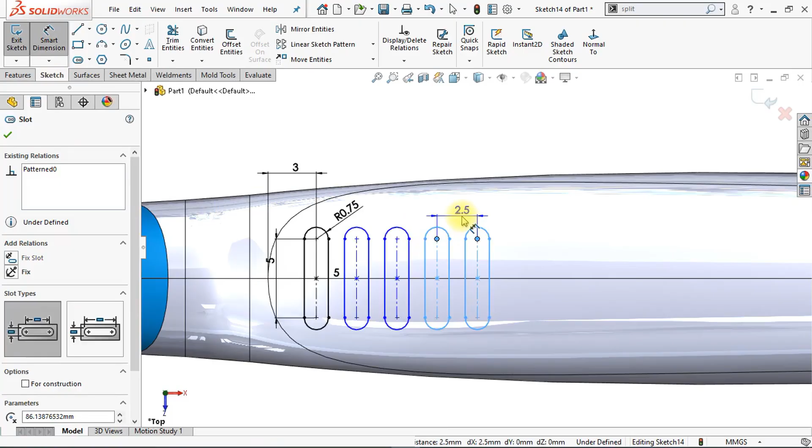Alright, now we're going to apply some smart dimensions right here as well, making sure that the distance between those two lines is 2.5 millimeter. And this will fully define our sketch.

Alright, now we're going to split those faces as well. Click the split line command, and select those 2 faces in order to split them. And now we're going to copy the appearances of this face right here.

Now we're going to select this face, hold down your Ctrl key, and also select those faces right here, this face as well. Now right click and paste appearances in order to paste the appearances.

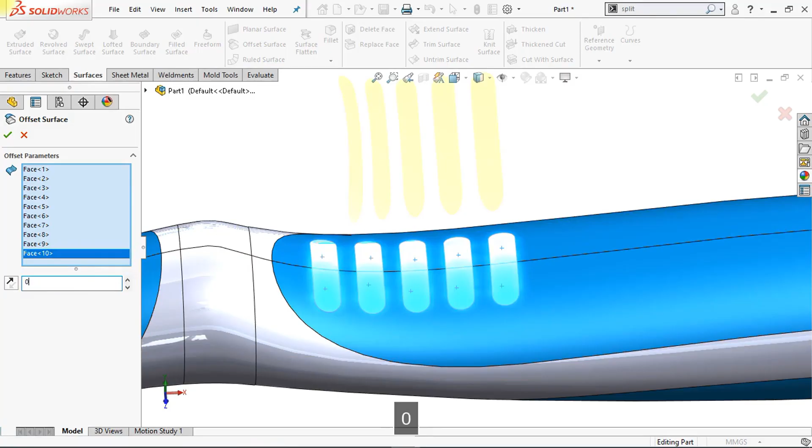Alright, now we're going to apply some thickness to those ribs right here. We're going to create an offset surface, select those faces right here and those faces right here as well. Make sure that the offset distance is set to 0 millimeters, and this will basically copy our surface.

Now we're going to click at the thicken command and change the thickness into 0.25 millimeter, then click OK. We're going to do the same thing for the second surface right here, click OK again, and for the third surface, click OK again. And of course also for those last 2 surfaces right here, making sure that the thickness is set to 0.25 millimeters for all those ribs.

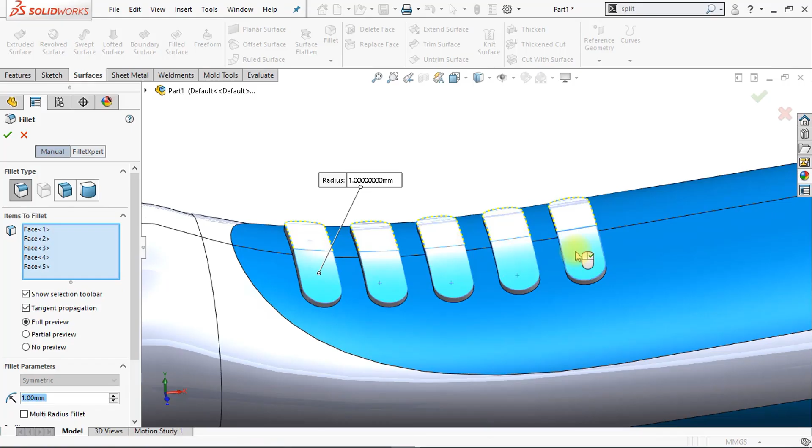Alright, this looks good. Now we're also going to apply some fillets to the edges. Make sure that the radius is set to 1 millimeter. Now we're going to select this face right here, this face right here, this face right here, and of course those last two faces right here as well. Alright, now click OK. And now we have created beautiful ribs to our toothbrush.

Alright, now we're also going to adjust the material of our main body. Select one of those faces right here, click at the appearance drop down menu, and select the part. Let's browse to the plastic folder right here. We're going to use the satin finish, cream satin finish plastic, for example. This looks nice, and of course we can apply any color you would like. Alright, this looks pretty good.

Now we're going to close the plastic command box right here, and we're going to change the scene. So click at basic scenes. We click at the backdrop studio room 2.

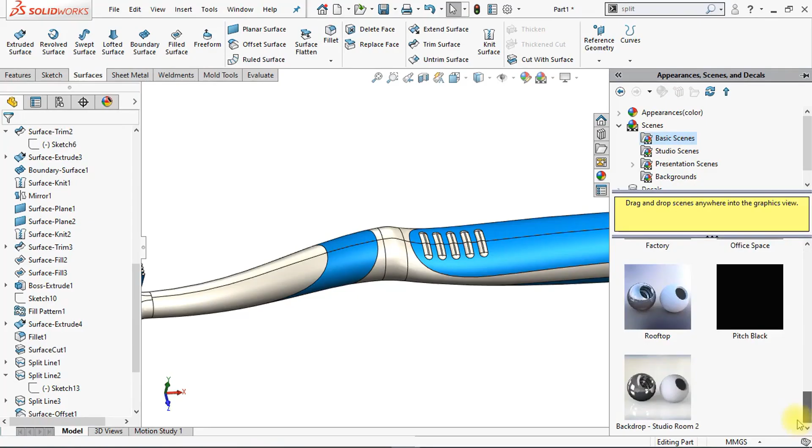Now we're going to turn on our render tools. Click at edit scene. We're going to make sure to set the background to color. Now click OK. Now you can see that the toothbrush is floating above the ground.

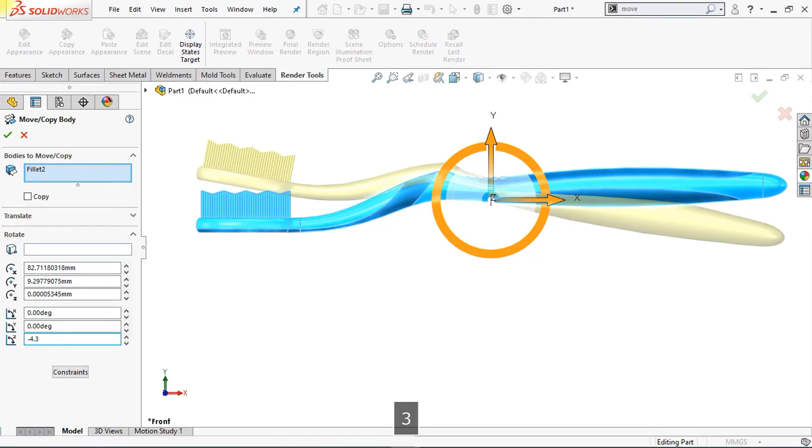So we're going to rotate our entire body a little bit by going to the move feature. Click at the search bar, select the move/copy bodies, and select our toothbrush body right here. Now we're going to rotate this body, make sure that the Z axis is set to -4.3 degrees. Make sure that copy is disabled, and now click OK. Alright, this looks much better.

Now, if you look closely to the floor, you can see that our toothbrush is still floating above the floor a little bit. So we're going to click at edit scenes again, and click at offset to geometry. Now the model will snap to the floor.

Alright, now we're going to turn off our shaded with edges, and hide our feature tree right here. We also can turn on the shadow, and of course also the ambient occlusion if we want. Now we have created a beautiful, beautiful toothbrush.

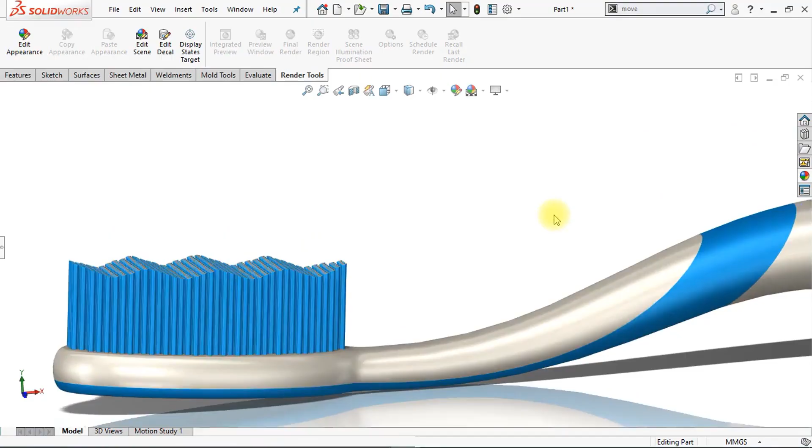Alright, now if I look closely to the hairs, you can see that the material is not applied to the top surfaces of our hairs. So that's something we're going to adjust. We're going to turn off the ambient occlusion, and show our feature tree again.

Now I'm going to copy the appearances right here. We're going to select a feature tree, and select the surface cut right here, and now we can paste the material to this feature. And now you can see that we applied the material to the top section of our hairs as well. Alright, this looks pretty nice.